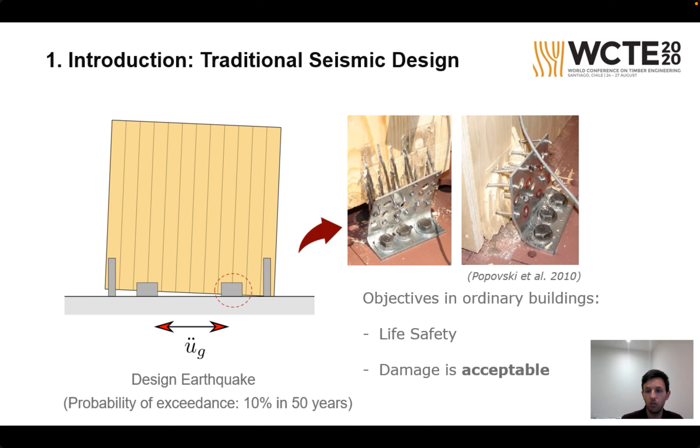Over the last years, performance-based design objectives have shifted towards damage control and continuity of operations after a design-level earthquake. In this context, the advantages of rocking behavior have been applied to the development of a family of self-centering systems that can sustain large lateral deformations with no significant damage. In the case of wall structures, like the one represented here in the figure, overturning moments are resisted by gravity loads and vertical post-tension tendons that can be provided to ensure that the system has a positive post-uplift stiffness.

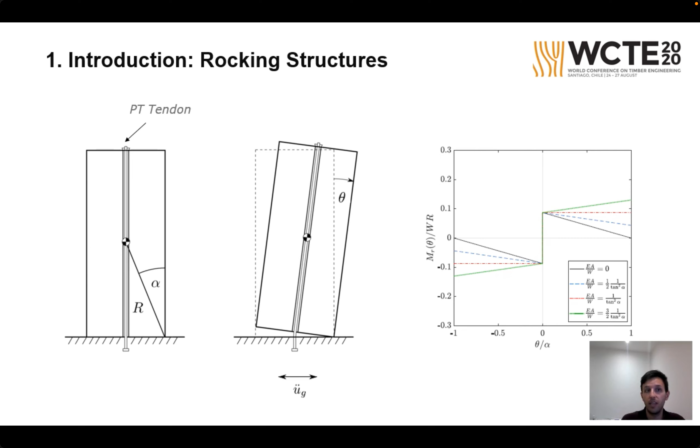Additional external dissipators can also be added to increase the energy dissipated by the system, like the U-shaped flexural plates shown in the figure here on the left. This configuration has been used in different timber buildings in seismic regions, mainly in New Zealand, like the picture shown here on the right, for example.

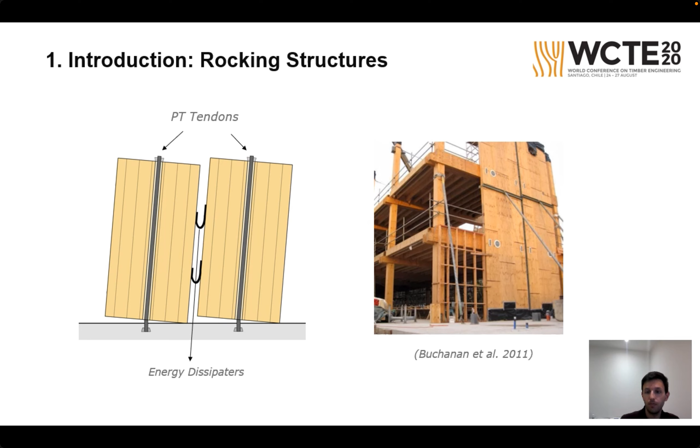Although these systems work very well preventing structural damage, previous studies have demonstrated that higher accelerations associated with impact at the base can develop throughout the structure, compromising the overall performance of the building. Figure A presents the base rotation response, and the instant of impact is indicated here with a dashed line. Figure B on the right shows the horizontal acceleration response at the first 3 mass levels. It is clear here that impact generates high-frequency vibrations that result in increased accelerations. As a result, even when subjected to low-frequency pulses, impact forces can excite higher vibration modes of the uplifted system and generate significant acceleration demands.

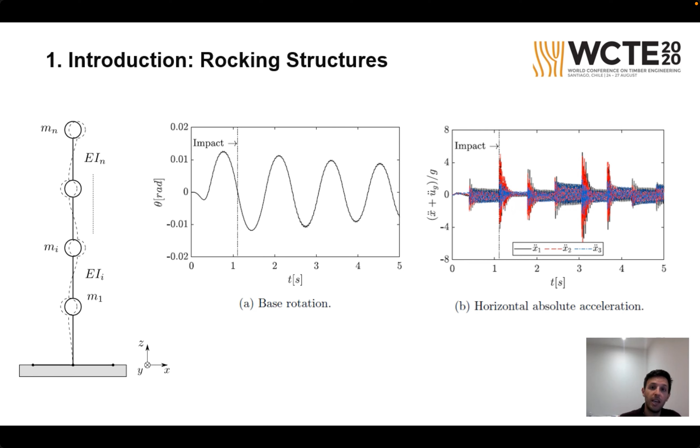One alternative to control these high-frequency vibrations is the incorporation of a mechanical device called inerter. The inerter develops a resisting force which is proportional to the relative acceleration between its terminals. Although several types of inerters have been proposed and patented, the general properties of the system can be studied by considering the particular case of a rack pinion flywheel device like the one shown here on the figure on the left. The system consists of a series of flywheels connected to a linear rack through a pinion gear mechanism.

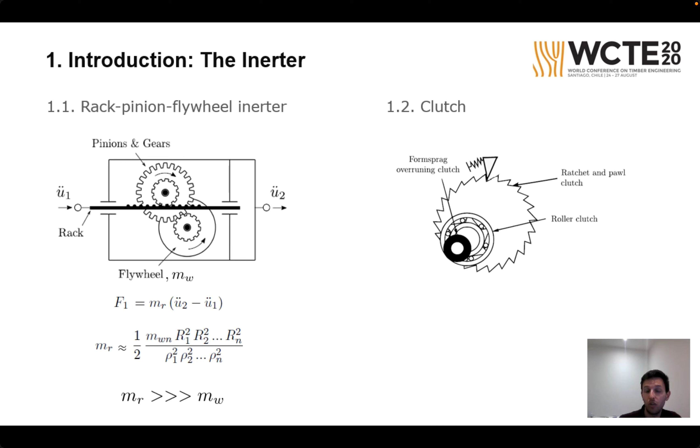By evaluating rotational equilibrium, it can be demonstrated that the apparent mass of the system, or inertance, is given by the expression on the middle here, mr, which can be several orders of magnitude larger than the actual gravitational mass of the device, and that's one of the main advantages of the inerter. The inerter can also be combined with a clutch, as shown on the figure on the right, to ensure that the device only opposes and doesn't drive the motion of the structure.

In this study, the ability of the inerter to control the rotation amplitude and suppress higher modes effects is applied to the seismic control of rocking timber buildings. To this end, a 6-story case study building was designed following direct displacement-based design guidelines. The structure is formed of rectangular modules of 12 by 10 meters and has an interstory height of 3 meters.

The structural plan consists of a frame in the transverse direction supporting gravity loads and 4 post-tension CLT walls providing lateral load resistance in each direction. External steel dissipators are also added at the base of each wall to increase the energy dissipation capabilities of the system.

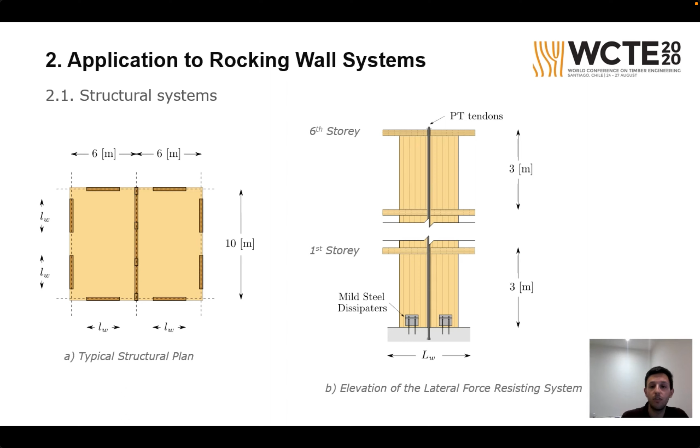The timber rocking walls were designed for a top story drift of 1.2% as target displacement. The design spectrum was taken from Eurocode 8, considering a high seismic hazard, a stiff soil, and a peak ground acceleration of 0.4 g. In this methodology, the 5% damped displacement spectrum is reduced to account for the hysteretic damping of the nonlinear structure. This is shown on the left figure, where both spectra and the design point are plotted.

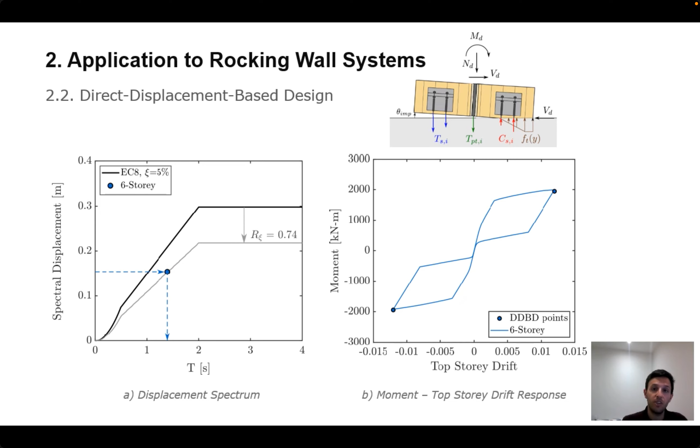The rocking section at the base was designed following previously developed guidelines based on the monolithic beam analogy. The forces acting on the section are shown above figure B, which also shows the characteristic flag-shaped hysteretic loop of post-tensioned rocking systems. For the design of the inerters, a ball screw and gear configuration was considered.

In this configuration, a ball screw mechanism is used to transform the linear motion of a rod into a rotation in a flywheel. A gear system is also included to further amplify the rotational motion, while a clutch can be incorporated to ensure that the inerter only opposes the motion of the structure. Since clutched inerters can only oppose one direction of motion, a pair of parallel devices is required in these configurations.

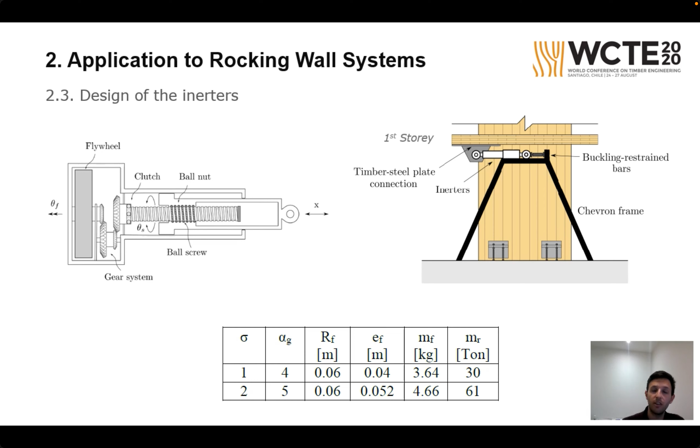Two levels of mass ratios are considered, 1 and 2, which are defined as the inertance over the total mass of the structure. The inerters are considered to be supported on a rigid steel chevron frame and connected to the first floor diaphragm. The results of the design are presented in this table, where we can see that the apparent mass of the device is approximately 10,000 times larger than their gravitational mass.

The numerical model used to represent the rocking walls consists of three components: the deformable body, the rocking surface, and the underlying soil. Linear elastic beam column elements are used to represent the flexible structure, whereas a zero-length fiber section is considered for the rocking surface. A compression-only material is assigned to the rocking section, so the system is free to rotate about the pivot points.

Energy loss during impact is incorporated by taking into account the energy radiated into the underlying ground. Accordingly, the structure is assumed to rest on a rectangular rigid foundation, while the soil underneath is represented by a set of vertical, horizontal, and rotational springs and dashpots whose mechanical properties are determined according to standard machine vibration theory.

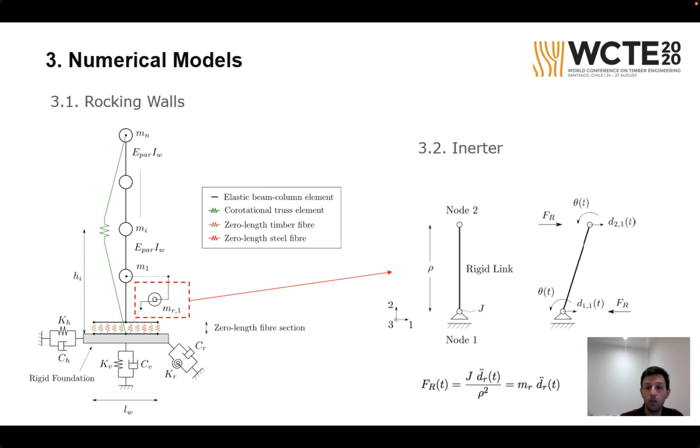Each structural model was first subjected to a set of 7 different earthquake records. The records were chosen so the mean spectral displacement demand is consistent with the design displacement spectrum within the period range from 0.1 seconds to 2.5 seconds. This range of periods was chosen to include at least the first 3 elastic modes of vibration of the 6-story building and the effective period of the substitute single degree of freedom structure.

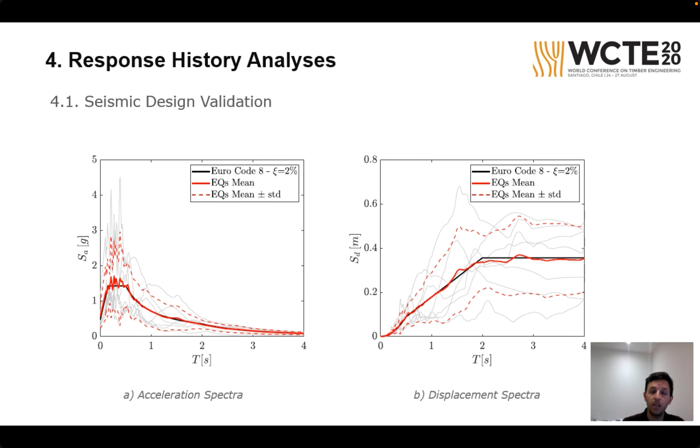The results of the analysis showed that the DDBD procedure adequately estimates the mean lateral displacement of the building, with differences of around 4%. These small deviations are likely related to a misestimation of the hysteretic damping obtained with the area-based approach. The shape of the displacement profile, on the other hand, is reasonably described by the design assumption.

The moment at the base of the walls is limited by the strength of the rocking section, and therefore is very similar to the design value. On the other hand, bending moments above the base and shears throughout the structure are significantly underestimated by the design procedure.

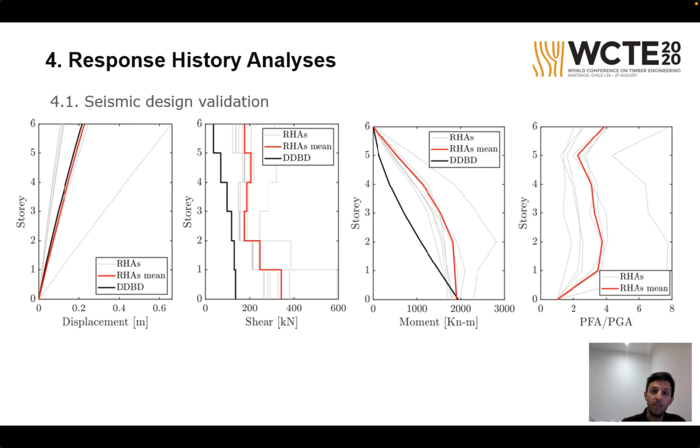This shear and moment amplification are caused by the response of higher modes of vibration which were not directly accounted for in the displacement-based design procedure. A first assessment of the effect of the inerters on the response of the case study structure was conducted considering the same 7 records used before.

Although the control of the higher modes response also reduces interstory shears in the higher stories, the connection of the inerter to the first story diaphragm significantly amplified the shear force in the ground level. As I mentioned before, a clutch can be incorporated into a system to ensure that the inerter can only resist and not drive the motion of the structure.

A similar trend is observed in the floor accelerations and bending moments distributions, where peak values of comparable magnitude are obtained along the height of the wall system for both inerter configurations. Crucially, a mild reduction in the shear force at the ground level is observed for the structure equipped with clutch inerters, reaching magnitudes even lower than in the unprotected case. This observation suggests that the shear amplification observed in the non-clutch inerter cases is related to a surge in the resisting force as the device drives the structural motion.

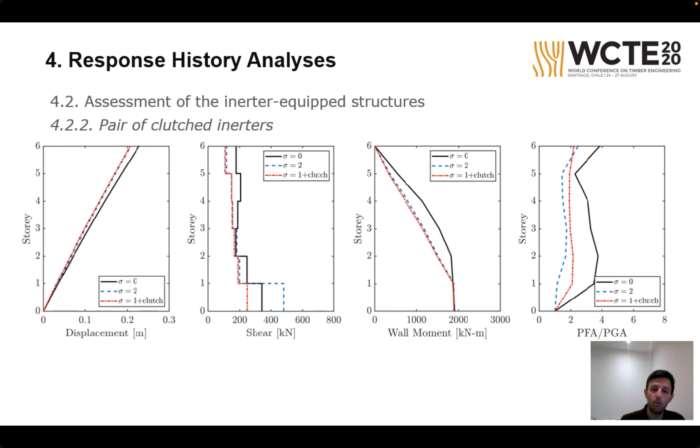A crucial consideration for the proposed system is that the resisting force developed in the inerter devices must be transferred to the ground and to the floor diaphragm. For this, the inerter devices are supported by a rigid steel frame and connected to the floor diaphragm through a screwed steel plate. Replaceable fuse elements are incorporated in order to limit the resisting force that can develop in the inerter and protect its mechanical components and the steel-timber connection.

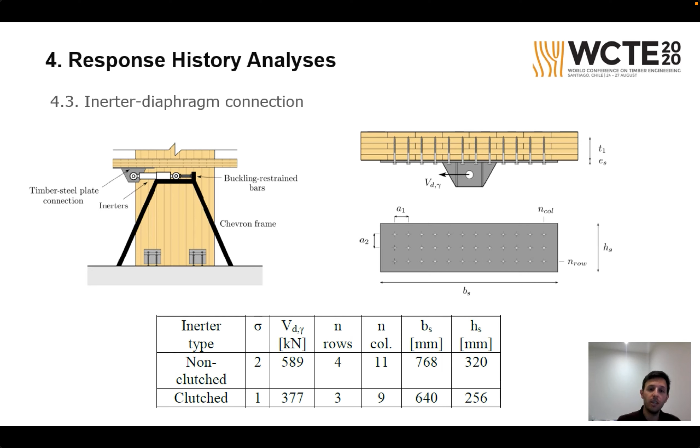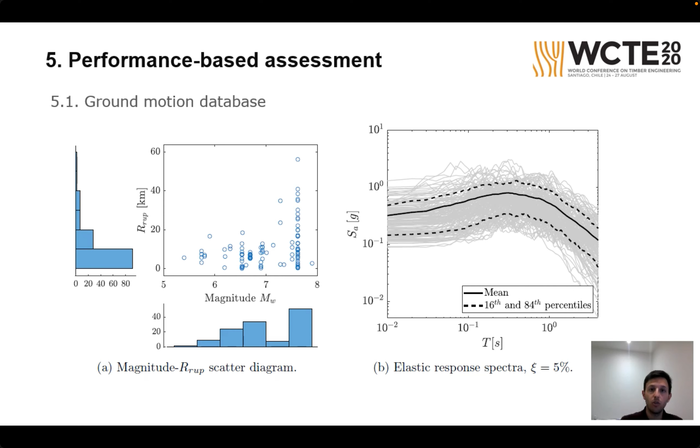Limit states associated with extensive non-structural and contents damage were defined for the lateral drift and peak floor accelerations. The interstory drift limit defined in Eurocode 8 for buildings having ductile non-structural components, which is a drift of 0.75%, is adopted for displacement-sensitive elements, whereas a floor acceleration limit of 1g is defined for acceleration-sensitive non-structural components.

Overall, our results allow us to conclude that inerters can be used to improve the seismic performance of a wide range of rocking structures, including post-tensioned timber buildings.